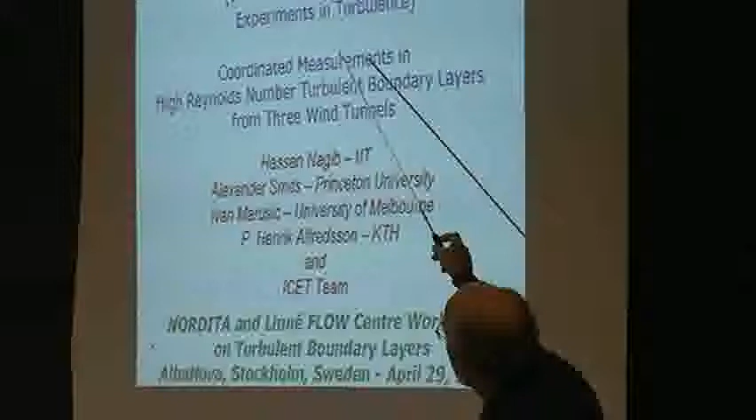ICET is the acronym we use, but this description is really the coordinated measurements at high Reynolds number, zero pressure gradient boundary layers in 3 different tunnels.

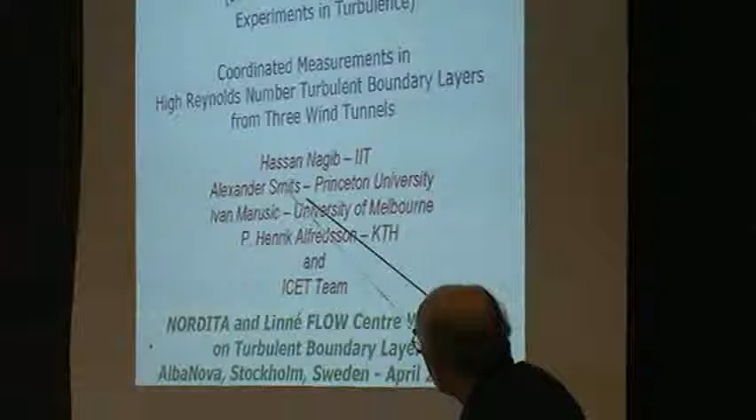There were 4 main groups, many participants. In fact, some of the groups had participants from other universities. For example, Beverly, who's here and who's declared, was part of this group, along with Alessandro, Danielle, Suji, and his colleagues.

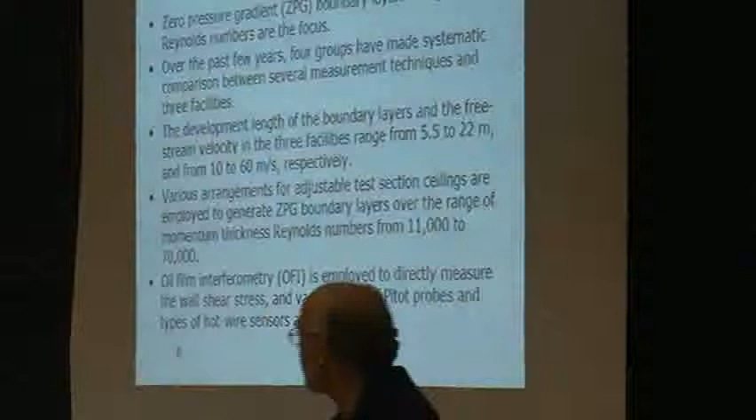They were in the KTH group. So, with that in mind, let me tell you what the scope is of the effort: zero pressure gradient, boundary layers, high Reynolds number.

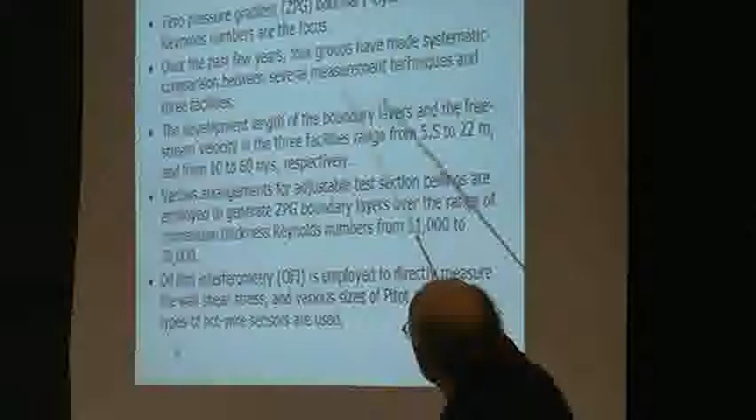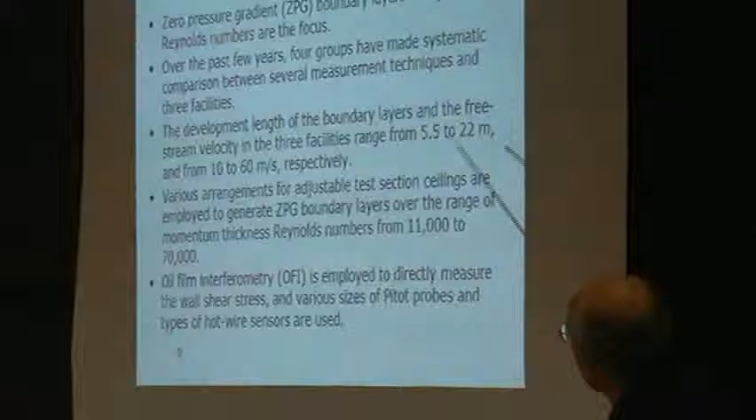There were some comparisons between facilities and so forth, but ultimately we wanted a range which is sufficiently large, as I will show you. This was the range of speeds from 10 to 60 meters per second, from 5.5 to 22 meters in terms of the X for developing the boundary layer, and the Reynolds numbers were basically in this range. This is the key to all of this, which will be discussed in the following talk by John Danielle.

This is an independent measurement of the wall shear stress. And as I said before, if you don't have that independent measurement, the value of your other measurements have very limited use as far as we can see.

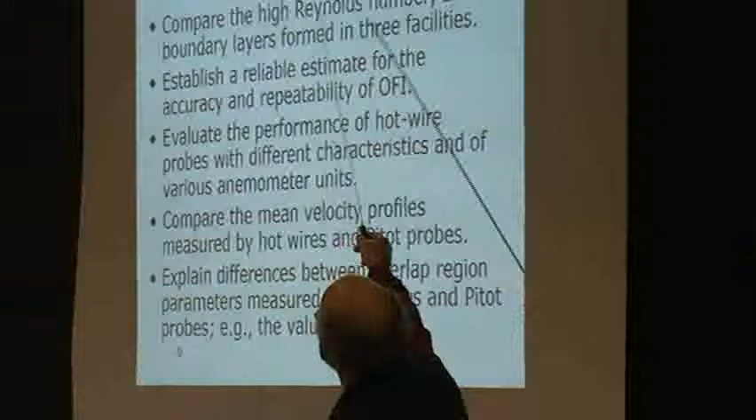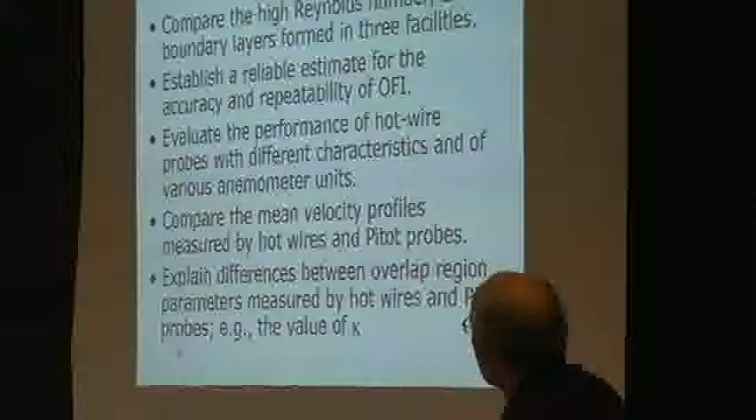Compare the high Reynolds number, zero pressure gradient boundary layer. Establish reliable estimates of the accuracy and repeatability of oil film. If you read in the literature, you see numbers that will be improved upon a great deal when John Danielle talks about his accuracy estimate.

This is something that Ivan already talked about, so I will skip it because he's highlighted some of the issues.

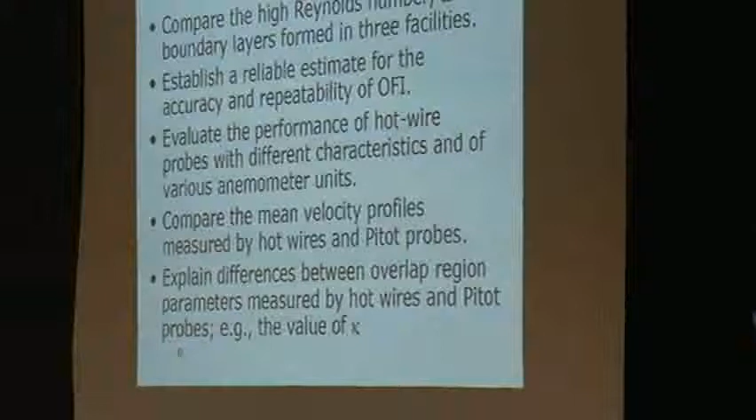We were interested in making comparisons between hot wires and Pitot. In fact, that's how the whole effort got started, in a conversation between me, Beverly, and Lex in some Canadian town some long time ago.

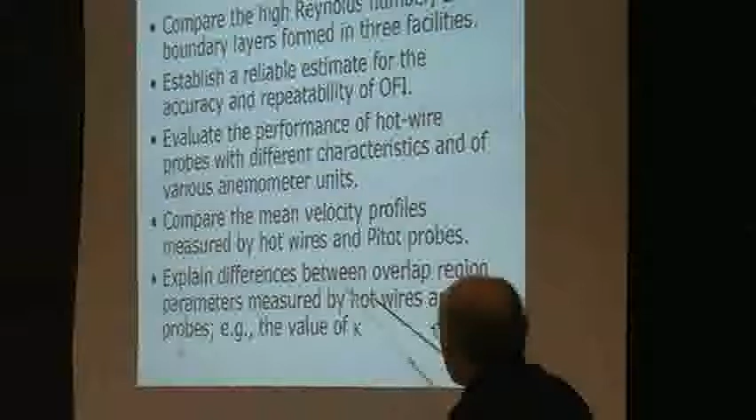And we wanted to find out if some of the differences are real and what they are, in terms of other overlap parameters, across 3 facilities. For those of you that were here last week, I kind of gave an advertisement for some of this.

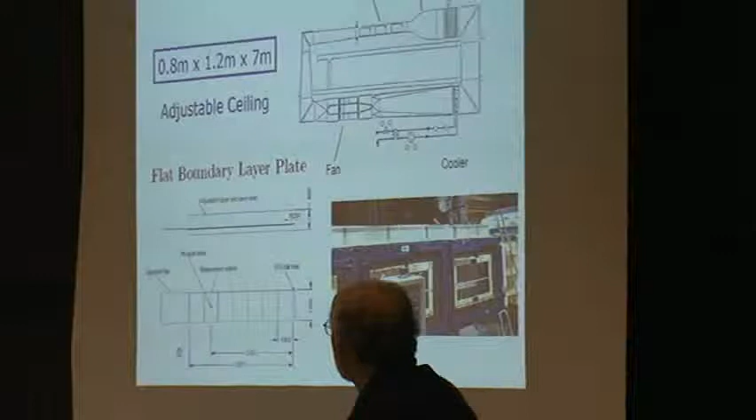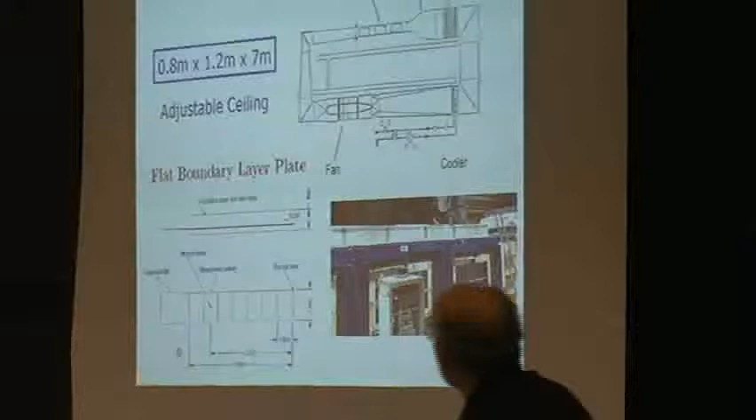This is the MTL tunnel. Most of you have seen it here. The dimensions of it will grow a little bit as we go to the other 2 tunnels. The speed range will go down from this tunnel as we go to Melbourne, or will go up in NDF. The NDF is a larger test section.

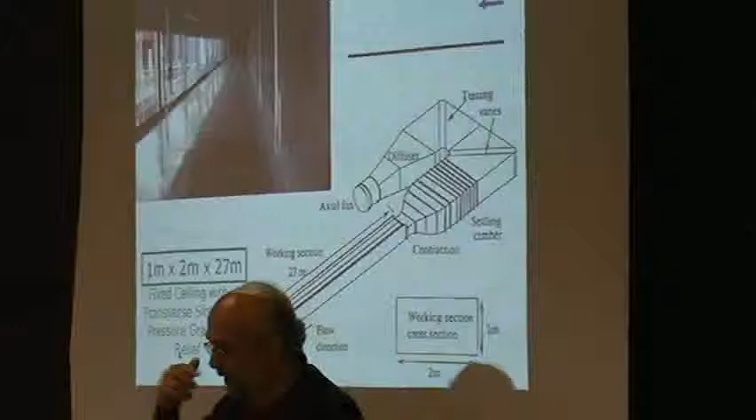This is a suspended flat plate. So is the NDF, but as Ivan pointed out, in the Melbourne tunnel, the boundary layer is developed on the floor. So as the flow comes out of the contraction, tripping was used in all the facilities.

That's a subject of much longer discussion. The pressure gradient is adjusted here by small amounts, flexibility changes of the configuration of the surface. In Melbourne, it is basically the pressure gradient between the test section and the outside with a fixed venting.

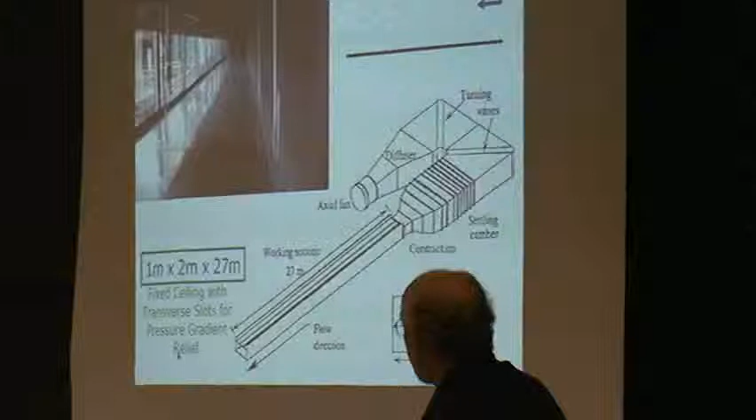In the question period, if we have time, I'll just say something about that, and I said something about it last Friday, but let me not spend any time on it now.

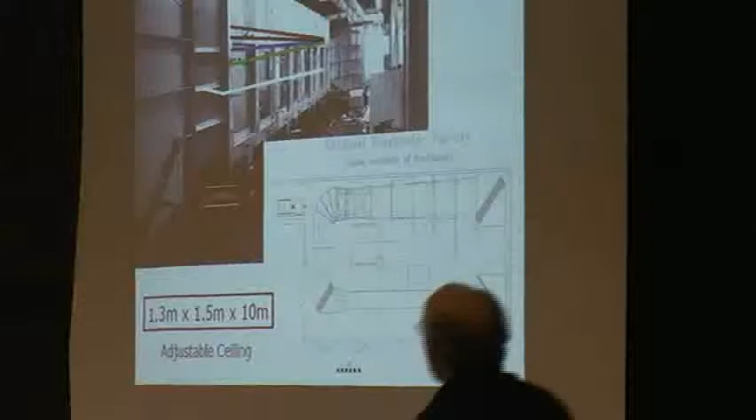The NDF has far more flexibility in terms of the adjustments of the ceiling and the test section, but in many ways the MTL and the NDF are geometrically very similar. The NDF is just a bit bigger.

With that in mind, if you take a look through the literature and plot versus RE delta star - I know people like RE theta, but from a theoretical point of view, RE delta star is much more robust because of the correct length scale being delta star in the theory, and the Rotta-Clauser scale.

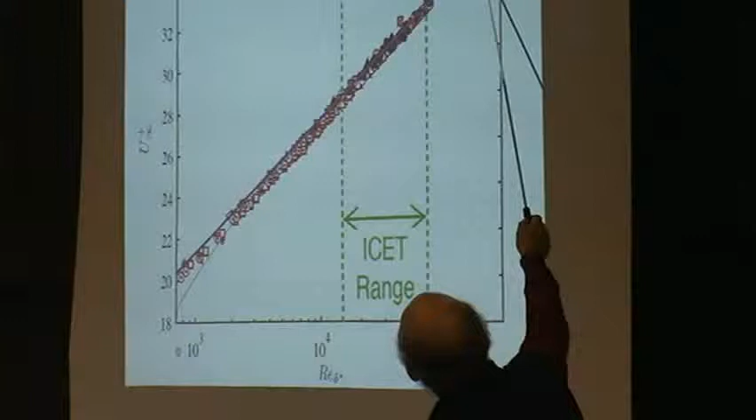The points you see here are the typical measurements, including some of the older NDF data, and so forth. This is the NDW work, Fernholz and co-worker. The range of the ICET measurements is here. In RE delta star, you basically need to get to here before you get to what we call high Reynolds number, okay?

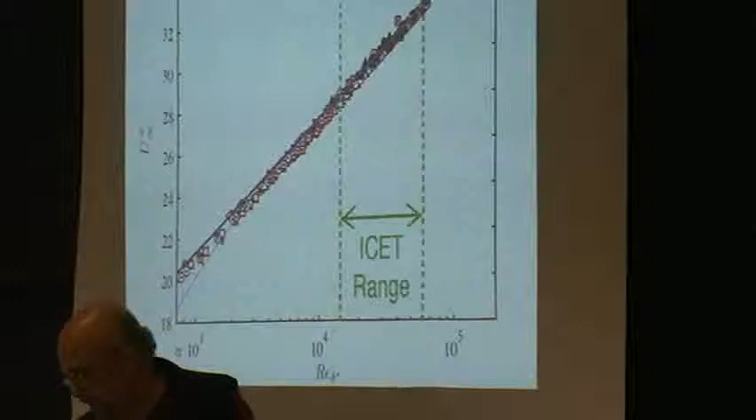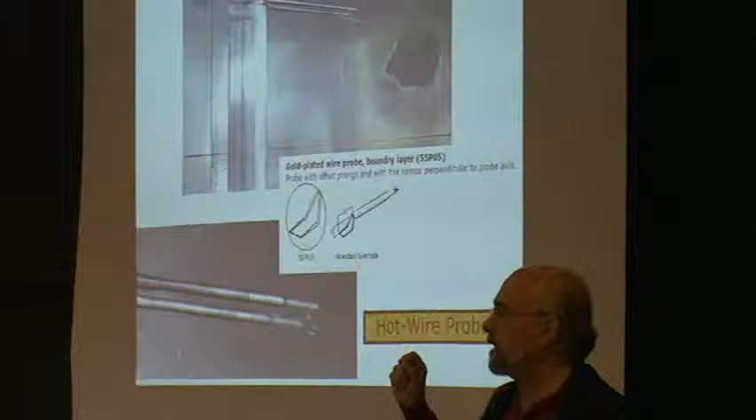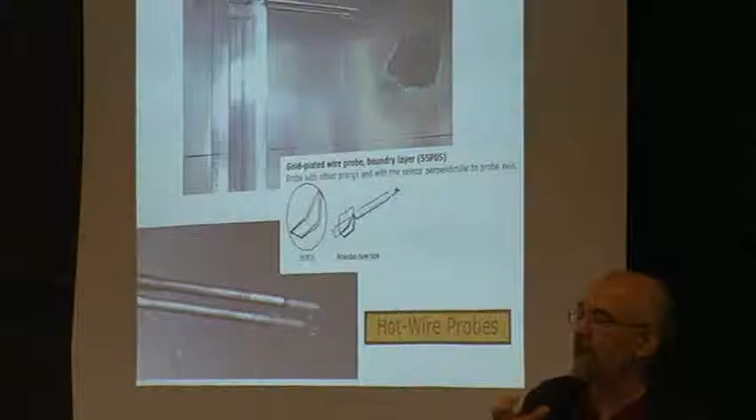I want to spend a few minutes on this because if this effort taught us something, it's that the Achilles heel of all these hot-wire measurements, high Reynolds number measurements, is basically the accuracy of your measurement of how far you are from the wall. It turns out, and I'll tell you how hard it is, that all the groups working on this ultimately need to rely on some kind of theory, DNS, or other tool to support their corrections.

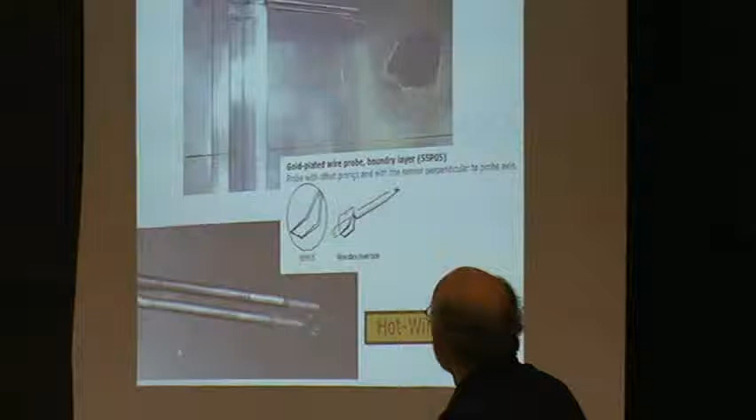It's very small because I don't give you the challenge. Some of the experiments—this happens to be from the Melbourne and IIT groups in the NDF—used a traversing mechanism that carried two probes simultaneously. One was a smaller sensor measuring the RMS and so forth, and one was measuring the mean, because of the drift issues that Ivan mentioned.

So as hard as you make the measurement to the wall, as I'd point out, you also have issues with deflection of the traversing mechanism as it traverses out, and deflection of other things. That is a big challenge.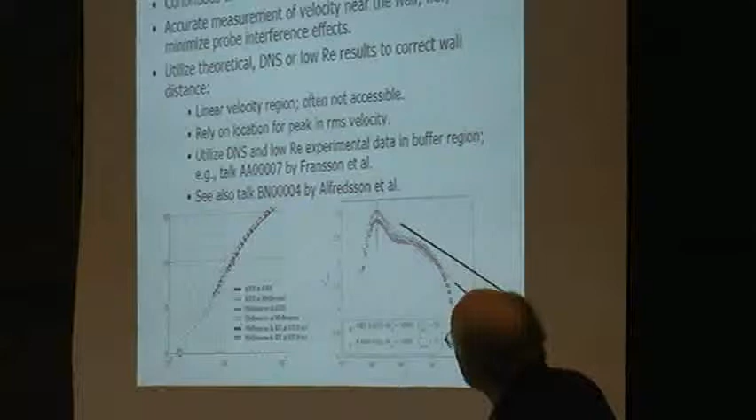I'm going to talk about this later, but Henrik will point out several techniques used to establish the true Y-plus. I'll tell you how the original Y-pluses were made, but there are several techniques here used by the different groups, and comparisons—I don't have time to discuss them all, but I'll use one of them as a sample here.

The initial measurements here—I'll take the example of the Princeton probe in the NDF. You use very accurate optics and electrical techniques and so forth to measure the initial distance, and quite often you measure it with very accurate measurements.

The point is, once you finish doing this, you have to close the wind tunnel when you start the flow, and that value is no longer exactly the same. Because we're not talking about big numbers, we're talking about microns, so it's very, very different. And then as the probe traverses and we're taking data, that reference value is also not exactly the same. This is true across all the measurements.

So I pointed it out here, and in effect you have the file of measurements. Sometimes the correction involves values of like 1 Y-plus or 2 Y-plus, which at these high Reynolds numbers are extremely small values.

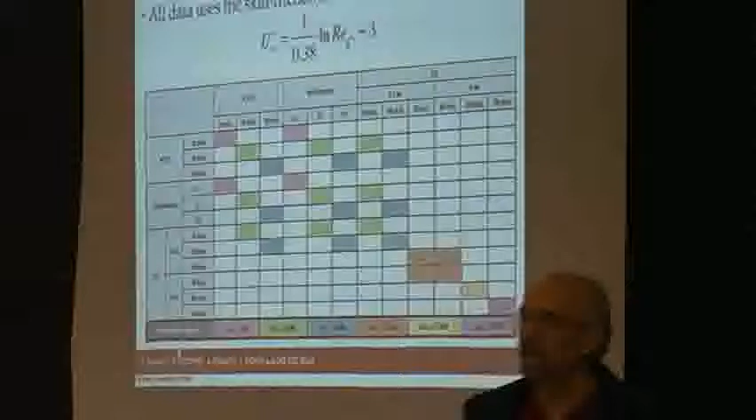Yes? Which are the dimensions of the object you are showing us—the actual physical dimensions, the length? I'll show you the diameters of these probes. I think, Dr. Beverly, this is... No, I was thinking of the main structure, the big thing.

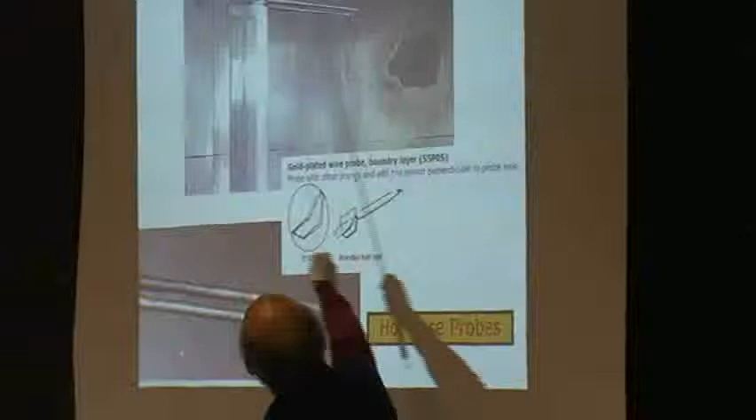Well, let me tell you, I'm focused in this photograph on something here. So you have the supports and so forth, usually measuring far upstream so as not to disturb them. But then the vibrational or structural problem you're mentioning—is this related to the main structure or just the small one? Both. Because the largest vibration you should get by...

Optical interferometry—we have, for example, in many of these measurements, the probe as it was traversed was followed by a camera, a high-resolution camera. But why not put a sort of diode or something that shoots light and then... Let's talk about that separately, because otherwise I'll miss making another point.

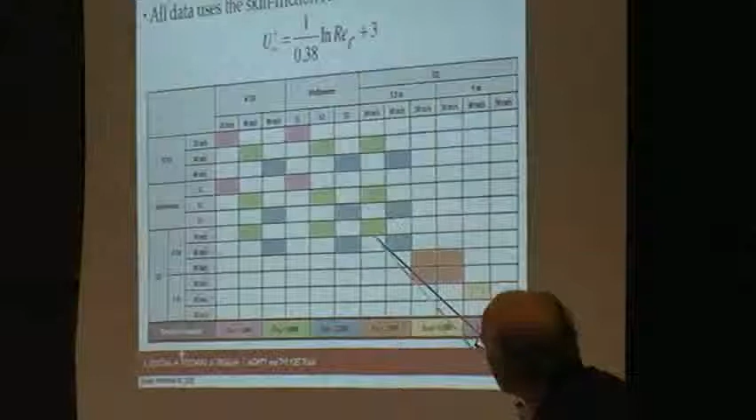So, three facilities, the velocities involved, the locations. In KTH, all of the measurements were at one location; now we're at three locations, and we have two locations. But you can see the Reynolds number range in Re-theta, and you can see the things that have the same color, showing that in different facilities we match the same Reynolds number.

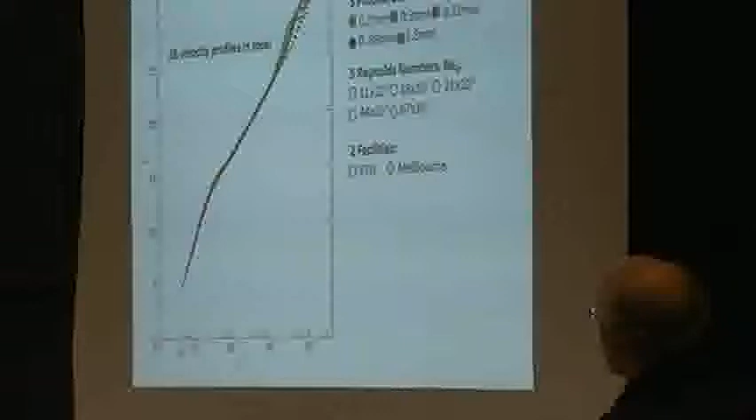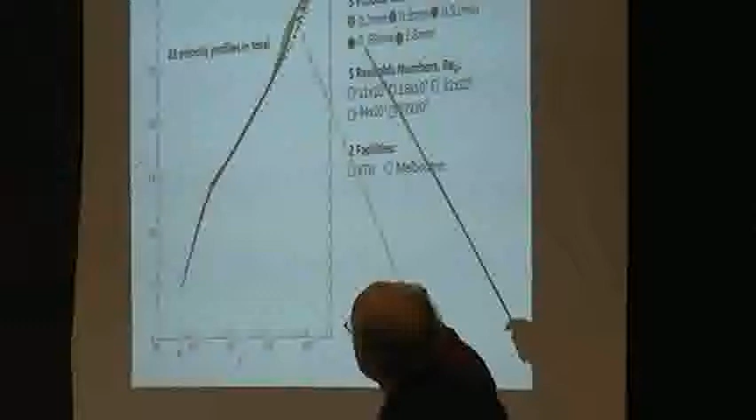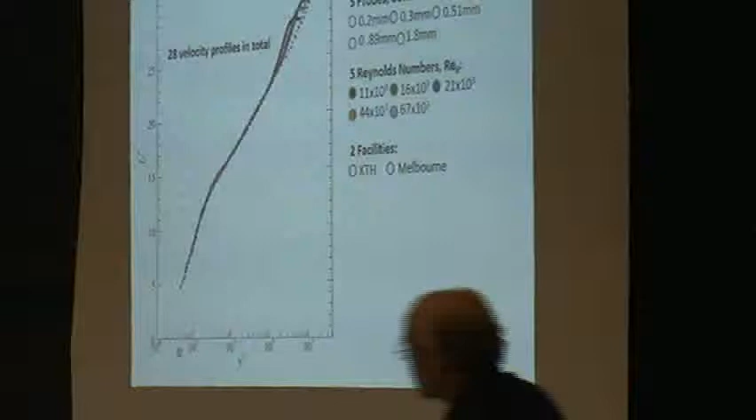Here's a comparison by the pitot probes in two facilities. This data, a slide I got from Sean Bailey, shows that with corrections of the pitot probe for velocity gradient effects, you can use pitot probes over a wide range and it collapses extremely well. We feel comfortable about that, contained in work Beverly and Lex have published. This is a comparison between the two facilities—there's a third one too, same probes, since they came to IIT. This shows measurements at different Reynolds numbers, and things look quite good here.

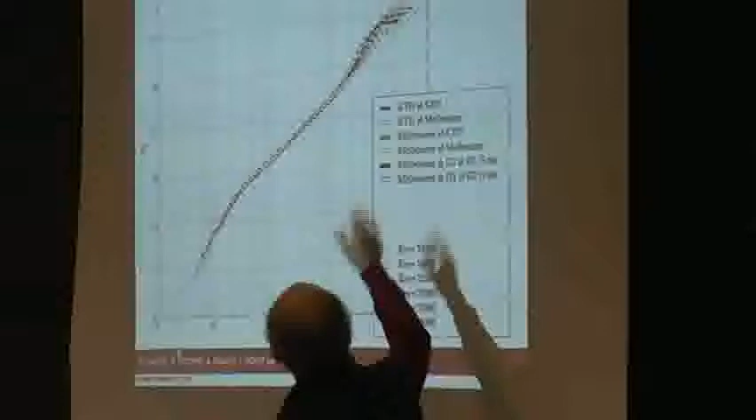In hot wires, I can show you that in the inner scaling, the collapse of the data from four of the tunnels in the mean looks good. I'm going to focus on a part coming up: the outer scaling, and I'll come back to this, of the same velocity profiles. This is data by different people, different facilities, different times of the year, different continents. But now let's start looking at some characteristics of this data.

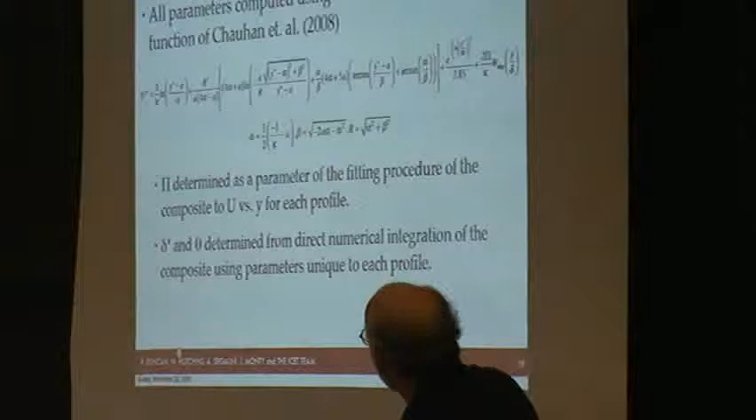For example, you can calculate the integral parameters. We've also fitted the composite profile, which I've talked about before, and out of that you can make estimates of pi and so forth. It turns out pi is an extremely sensitive parameter.

If you take a look at the shape factor as a function of RE delta star, this is the relation we published recently, with plus or minus one percent. The data from the various experiments cluster very well—this is an extremely enlarged scale.

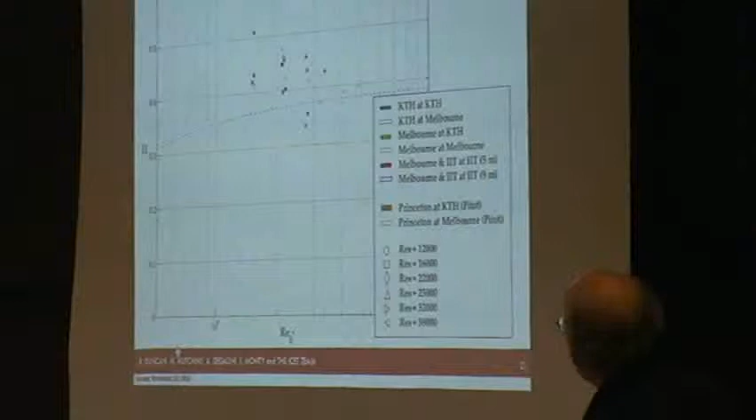If you go to pi, pi is a bit tricky—you have to be very careful. This is the similar asymptotic relation we derived; the data actually settles to this Reynolds number. The kind of collapse that has been reported in the literature by Coles and others, we don't see. I think it's a manifestation of problems with fitting the profile, the log-law estimates of kappa, and other things.

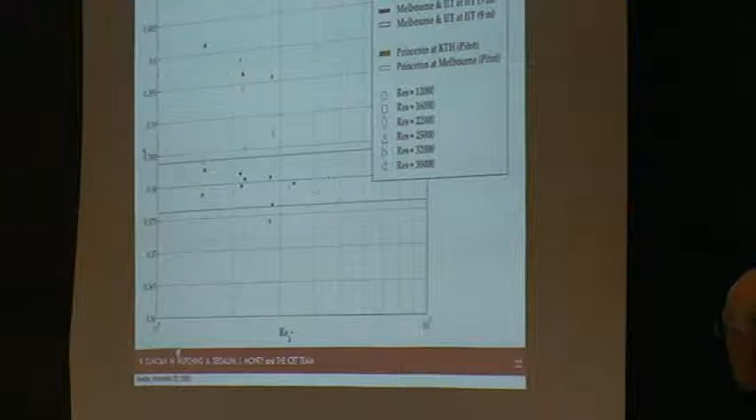Here is the first interesting result I'll show you: the initial estimates of kappa using this approach consistently cluster around 0.38 from all of the measurements, with the exception of those obtained by the Pitot probes. So this is already a difference—we're talking about small differences, but it's about a difference of 0.01 or so. And this is, in a way, what Beverly, Lex, and I started thinking about.

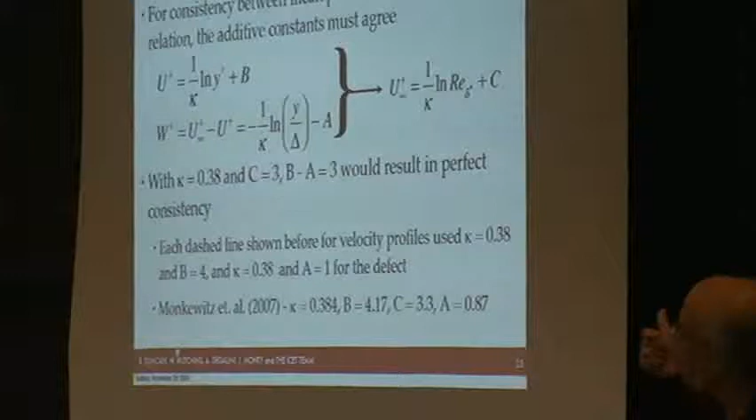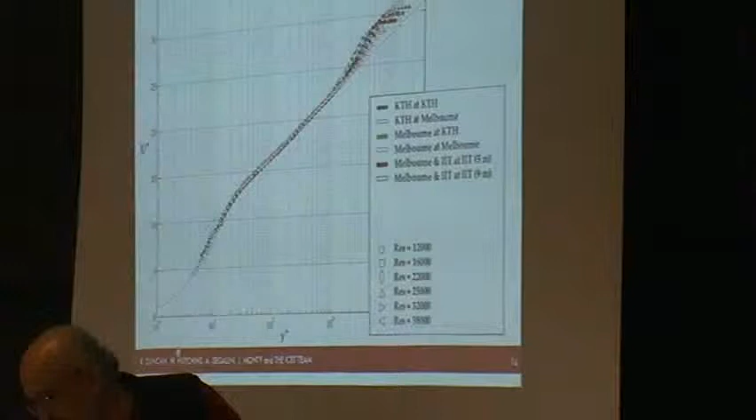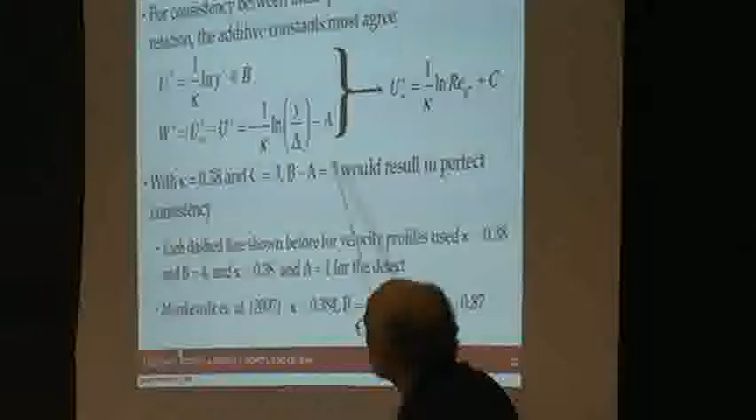Before I explain that quickly, let me tell you there are ways to check the consistency of these results. Fitting these curves I showed earlier, one should not do arbitrarily—the slope here, the slope in the previous figure, and so forth have to all be consistent. You can do that by looking at the outer fit, the inner fit, the skin friction relation, and these constants have to be consistent with each other. If they don't add up in the asymptotic limit, something is wrong.

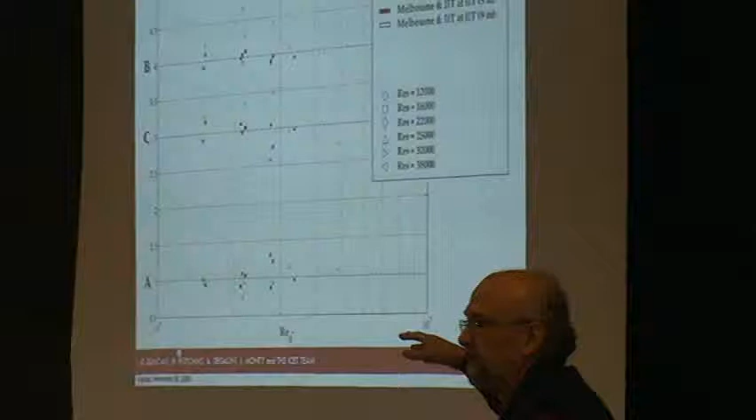We've talked about this in some publication—the reference, I believe, is down there. Here is Rich Duncan's calculations of A's, B's, and C's. Remember, the C you get from the skin friction curve that John Daniel will show you, a completely different oil film measurement. The A's and B's you get from the hot wire fit, and they better add up to each other. You can see how well the data agrees.

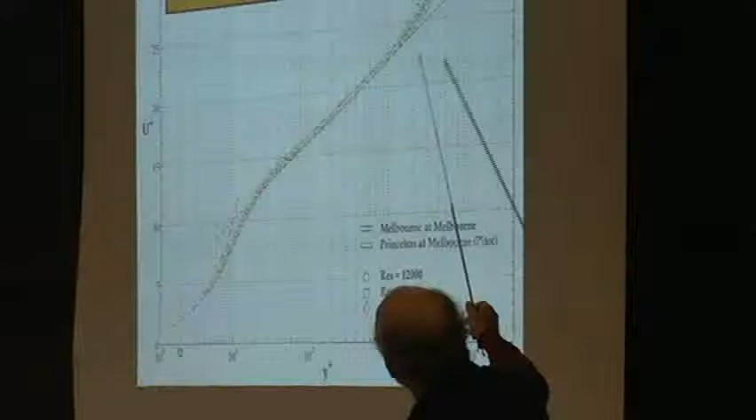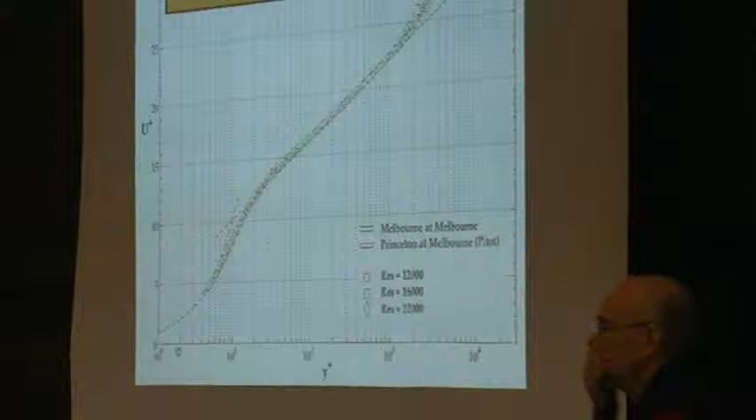This is all zero pressure gradient boundary layers. There are symbols here in green that are hot wire, and in this brownish color is Pitot.

Okay, so now I focus on this zone. The same two codes in color. Actually, there is some blue data which is also hot wire. You can see there is a difference here between those two sets, between 10 and 100. Not in the log law. Remember, the log law starts around 200 or so.

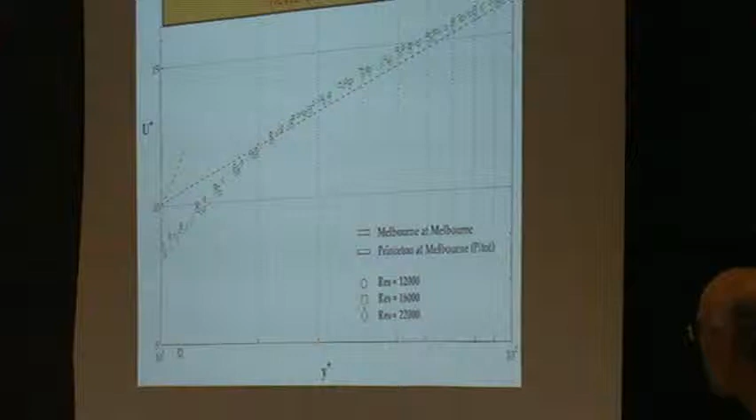And that difference is correctable with very simple turbulence intensities. In fact, I'll show you the correction. I say here, this is preliminary, and even amongst the various ICET groups there are different views. So this is my current interpretation of things, but we can discuss that.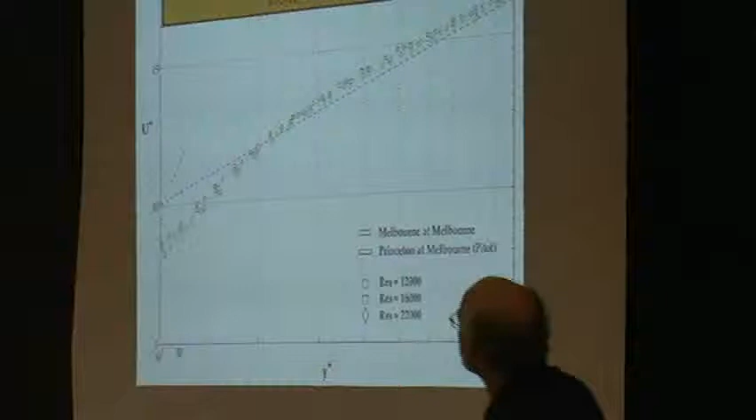And skin friction was measured the same. Skin friction is determined by the oil film, and once you get that U tau in that Reynolds number, you don't touch it anymore.

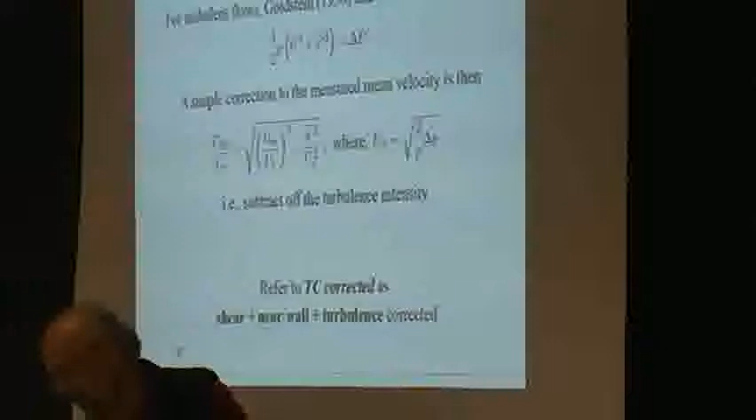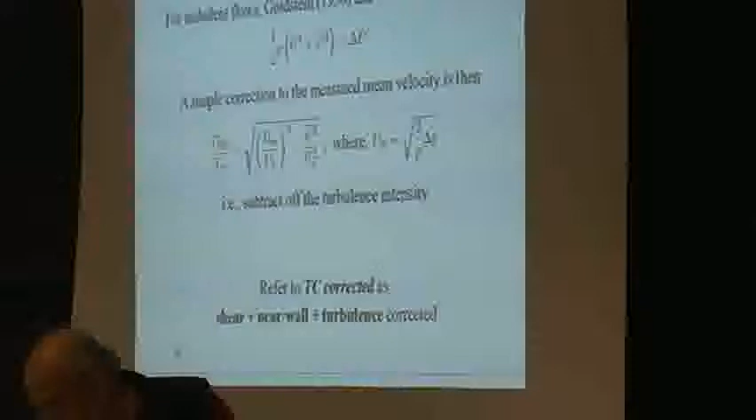This correction was done both by Rich Duncan and by Jason Monty. This happens to be Jason Monty's slide, using very simple corrections to the turbulence intensity. Now, this correction in that zone actually leads to a difference in estimating kappa by this much. It is basically, and I'll show it to you, so about a 0.01 difference.

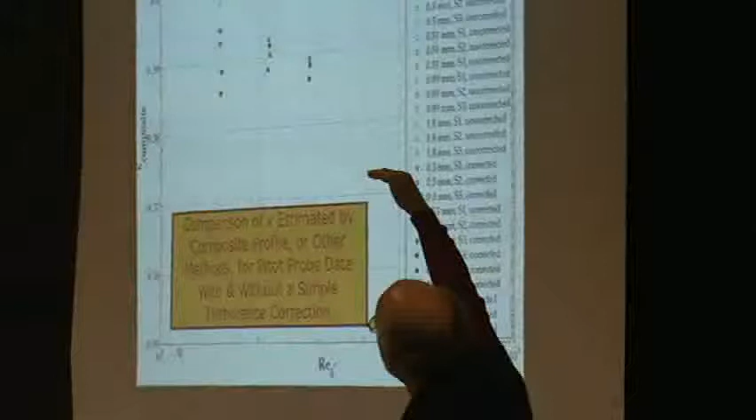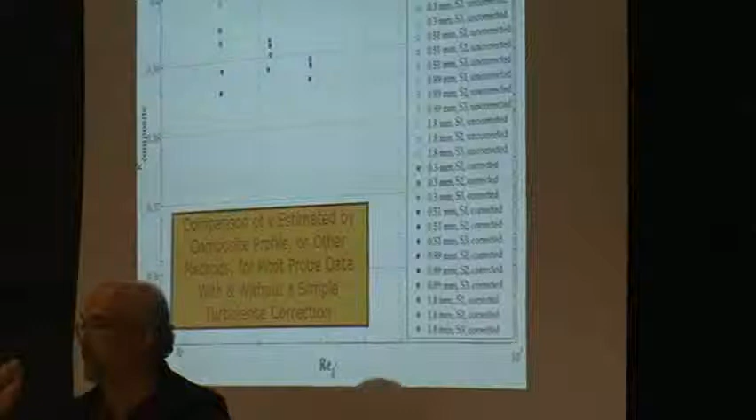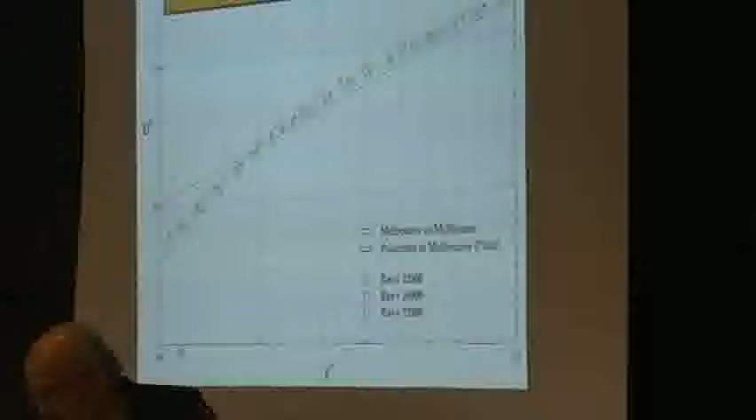Just this is uncorrected for turbulence, this is corrected. That's why you weren't looking at the log region, so how are you getting kappa? Because it is using the composite fit to do the whole profile. As I said, we do this, all these kappas were done using the same composite fit. Okay, now here's a different way of doing it by Jason.

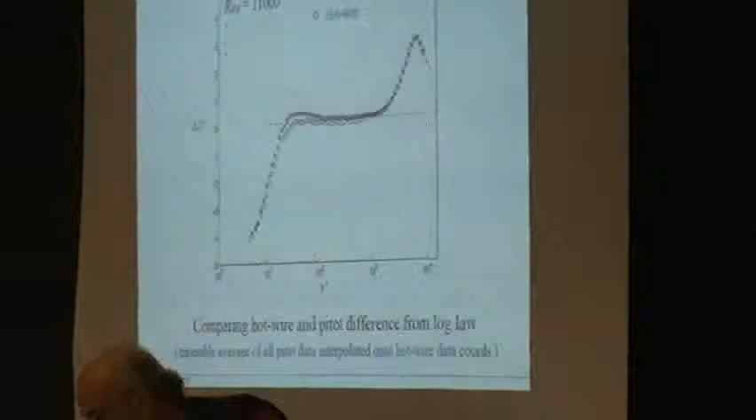On Jason, uncorrected, corrected. Now, semi-corrected means it isn't, but let me plot it this way. So, uncorrected is here. This is corrected only for the mean without the turbulence intensity. This is all pitot probes. Now, this is all the pitot probes corrected as I just showed you, and the hot wire.

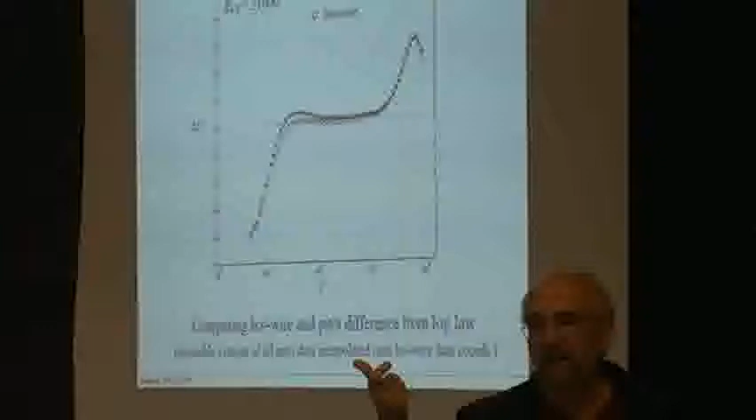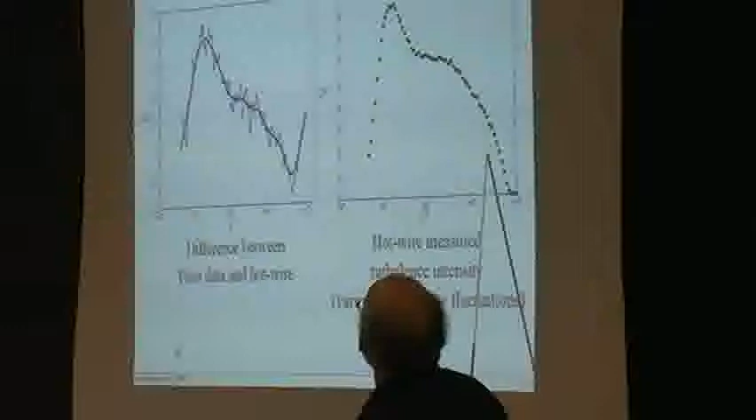This is basically delta U plus, which is the difference between that value and the reference value. You can do this also with the indicator function, which is the derivative. Now, what happens is if you correct it, or you take the difference between them, you notice that the difference between them concentrates where the turbulence intensity is high, namely between 10 and 100.

Which do you think is the correct sort of scale in your mind? I don't know, well, I mean, as I think there is a slide here from Jason says, first of all, that's a separate question, is which is really more accurate, okay?

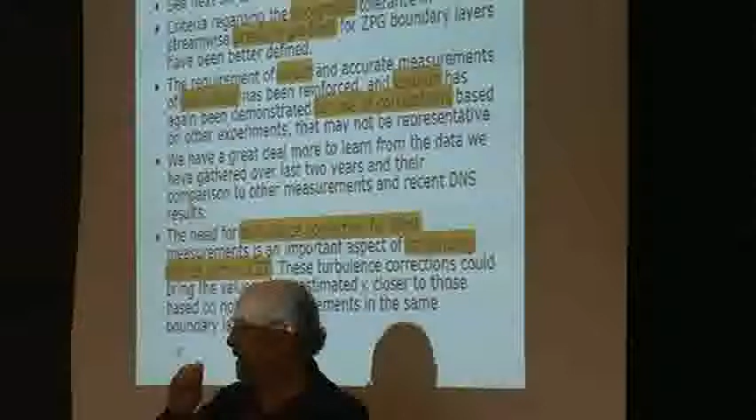But the point is we're highlighting the fact that if one accepts the pressure measurements of pitot probes are influenced in the high turbulence level region by turbulence in addition to other effects, and just simply corrects for them, it brings the two together. Not really collapse on each other. Virtually collapse on each other. In fact, I think I forgot to add one slide from Jason. I apologize.

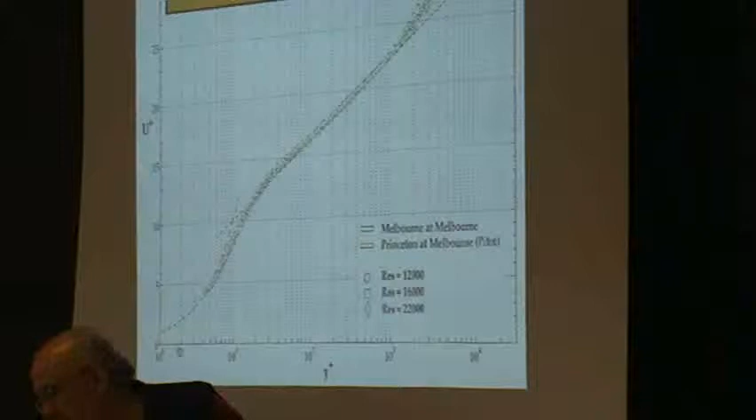If you make that correction, this curve drops on this curve. Okay, just the same way I showed it earlier, this is Rich's values of it. Here's without the correction, watch what happens to the yellow points, and this is with the correction in the same region.

Also, Pitot only measures the total pressure. The pitot is measuring only the total pressure. The static pressure in all of these measurements were at the wall using the criteria established by Beverly. So there was no error from measuring the static pressure at the wall.